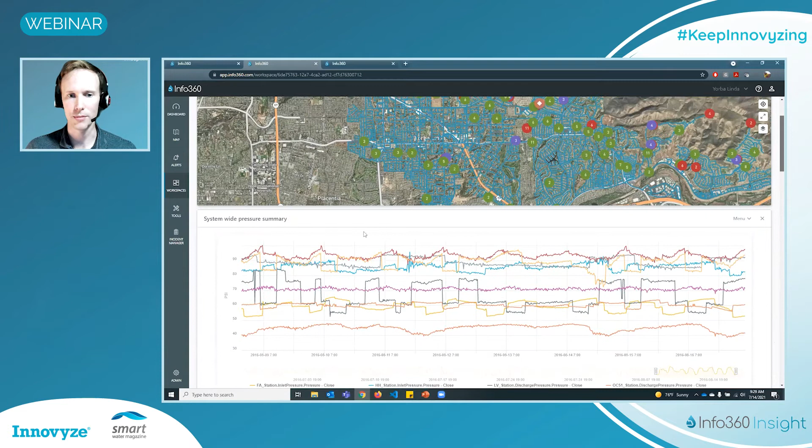So really, just like a typical web dashboard, we can set up web maps, graphics, displays. These are fully customizable, so you don't need programmers to program it and have it etched in stone where users can't customize it. Any user can take these, duplicate one that we've already created, and then zoom in on the data.

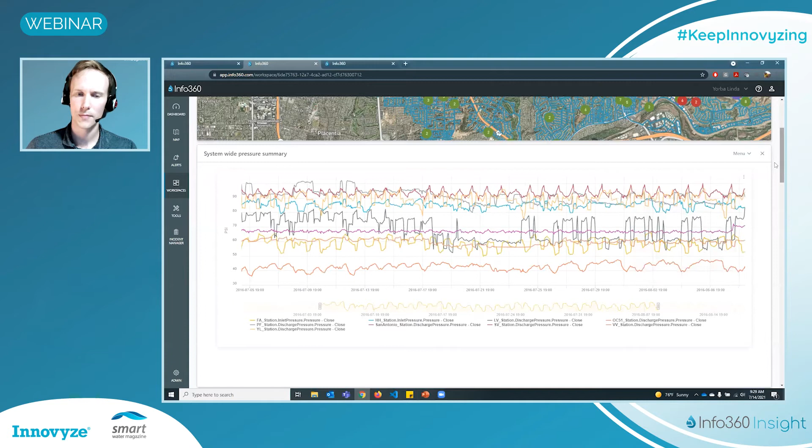Once this is up, sifting through the data is really fast. We can zoom at different time scales and load in quite a bit of data. These are different pressure sensors. I can highlight the different pressure sensors, and I can overlay different alert thresholds, moving averages, or other analytics. If I step down, we can also look at gauge charts.

In some cases, operators, rather than looking at a history, may want to just see at a glance the snapshot of how things are right now, one for each pressure zone, for example. So this shows the latest value and then a peek at the latest 24 hours.

We can also look at a long history. This is 3 years of pressure data overlaid with a moving average, so you can see the instantaneous results compared to that moving trend.

Here's another example where I think this is just a 15-minute pressure sensor. You can sift along, and as we get to a certain event, the pressure drops down to around 45 psi in this zone. One of the nice things about having all of the data accessible is that when that pressure drops, you can easily lay out these workspaces and have access to other sensors.

A pressure drop by itself, we're not really sure exactly what that means. But one of the things we are doing is calculating the water usage each hour of the day for each zone. So here is a look at that water usage for that same pressure zone where this pressure sensor came from. Corresponding to this, on March 23rd, where that pressure drops, we see a corresponding large jump in water usage.

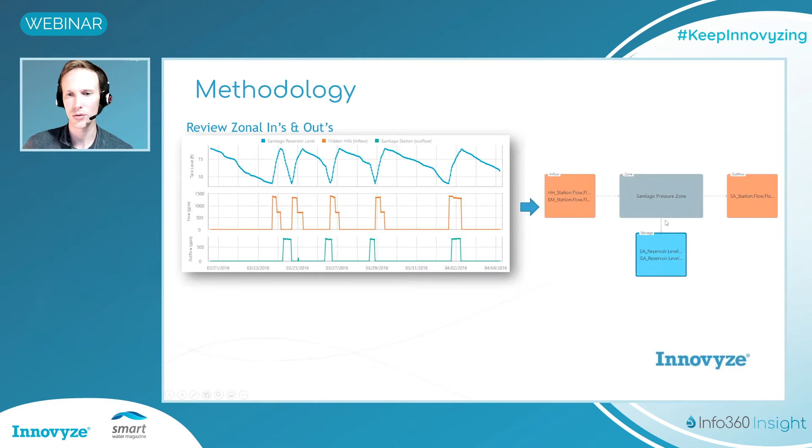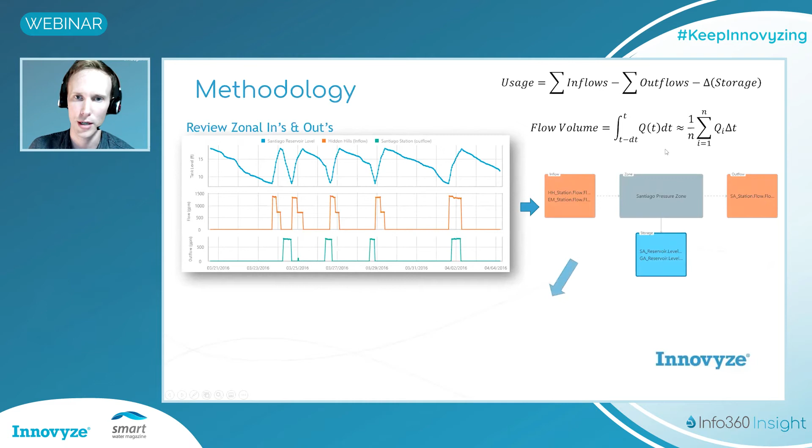The requirements are flow meters at all main boundaries between the zones, and tank levels with their storage parameters. Just a quick note on the methodology: if you have a zone where we have a tank level going up and down, and pump stations flowing in and out, from the UI we can just drag in those corresponding sensors into our mass balance network. We do simple mathematics, summing up the inflow volumes. For the flow, we integrate the volume over time based on the time steps you have for your actual flow data. The outcome is that diurnal time series.

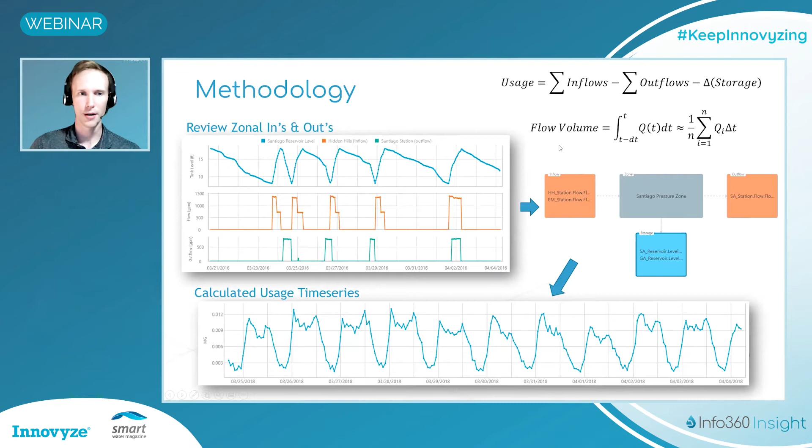This is kind of a pretty foundational thing that you may already have if your system has DMAs, but I know in North America, where Scottsdale is, not many have this, or not many have the paring down at this kind of scale. So where can we set this up?

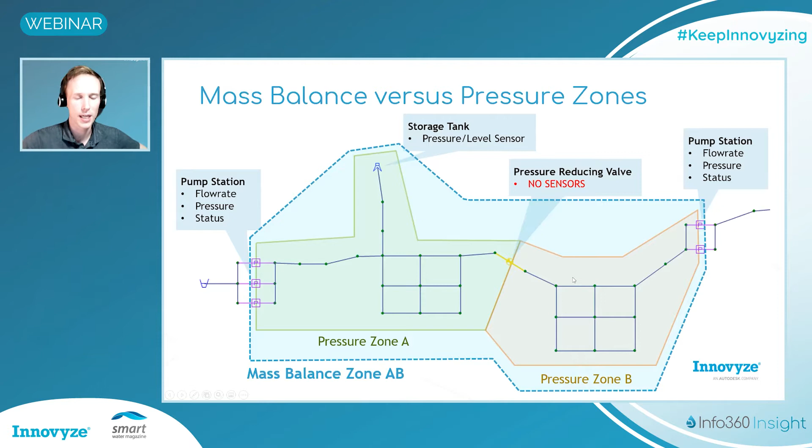That's one of the things we're going through with Scottsdale. They have 149 different pressure zones, but a lot of instances where there are PRVs where we can't isolate. So we are doing mass balance where we lump together zones. There are a lot of benefits where we can do leakage reporting and burst analysis on those lumped together zones, and then help them identify and prioritize locations where adding a flow sensor can divide up your analytics and get you a lot more value out of what you have.

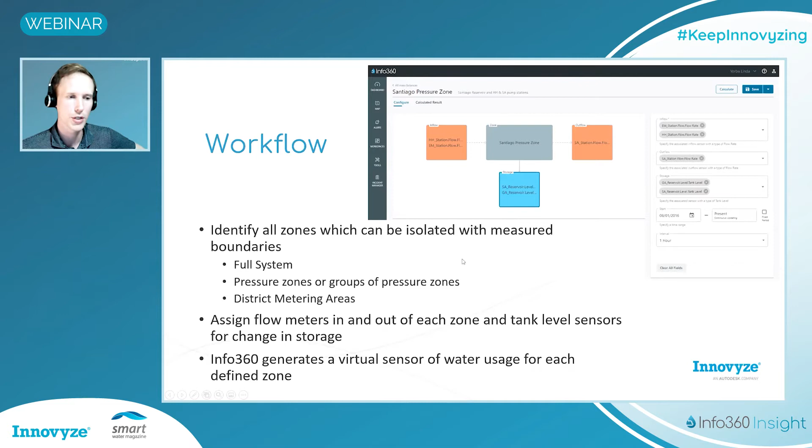So the workflow—this is the UI. We don't need to go into too many details because we can help set this up during implementation, but there's a UI where it's pretty seamless to just drag in the sensors for inflows, outflows, and storage and set that up. Then it generates that time series like a virtual sensor in real time.

There's a pretty simple UI, so we can set this up for your mass balance, but users can customize these different patterns pretty easily using the interface.

Another key value is looking at pump efficiency. What we can do is take the pump sensor data based on what's available, and display real-time points of where the pump is operating along its curve. The outcome is that the operations and maintenance team can then prioritize pumps with the highest deviation from the manufacturer's curve.

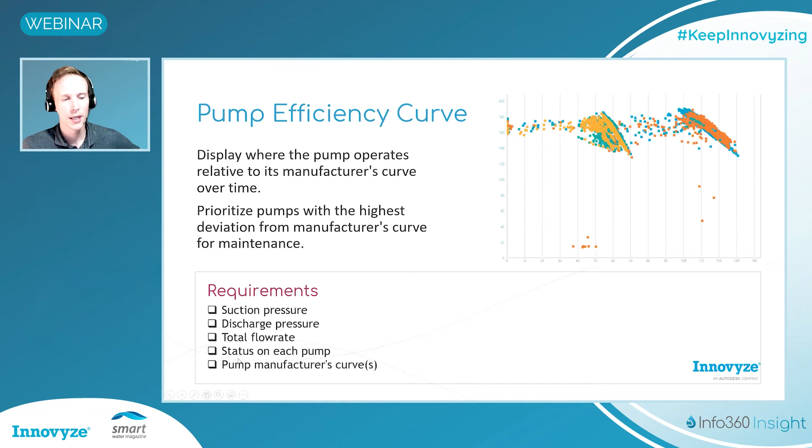And so you can see which pumps are performing the least efficiently, essentially. The requirements for us to do this on a given pump station are a suction pressure, discharge pressure, the total flow rate, a status sensor on each pump, and ideally the pump manufacturer's curve.

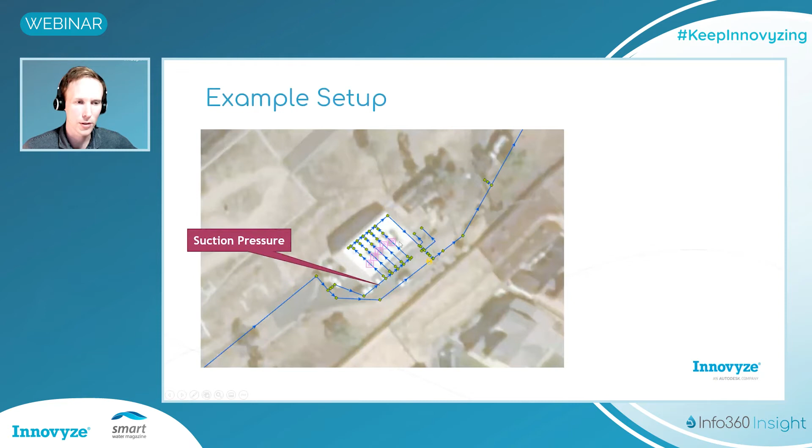So just a quick look at what that looks like. If this is a pump station with the flow directions, we usually have a suction pressure sensor around there, a discharge pressure sensor, and we need the total flow rate. Usually in SCADA, there might be graphs like this that we can generate.

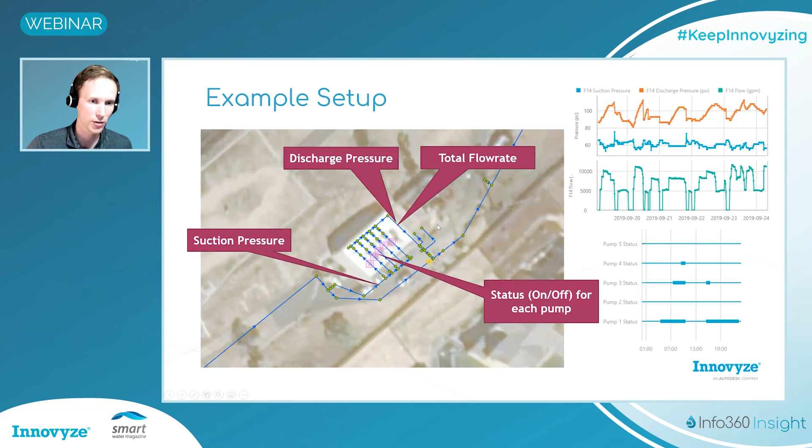And we also need, in this case, if there's 5 different pumps, the status sensor for each pump so that we can use these statuses to filter out the total head difference and flow rates, and then filter out the times when each individual pump is operating by itself so we can isolate individual pump performance. So we don't need pressure or flow on each individual pump, just for the full station, but we do need the status on each individual pump.

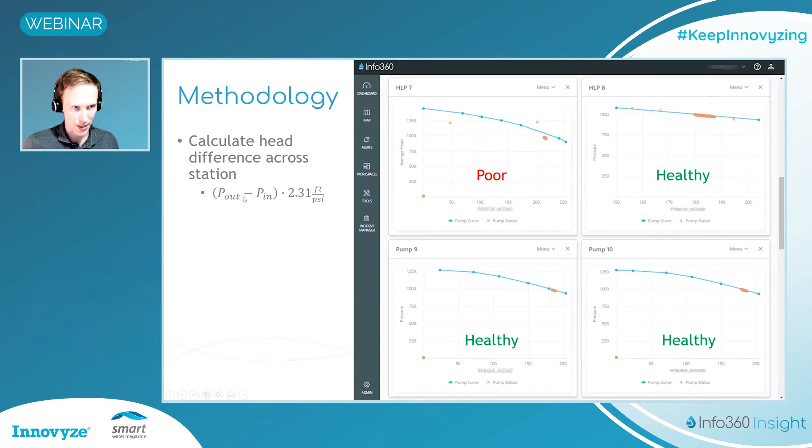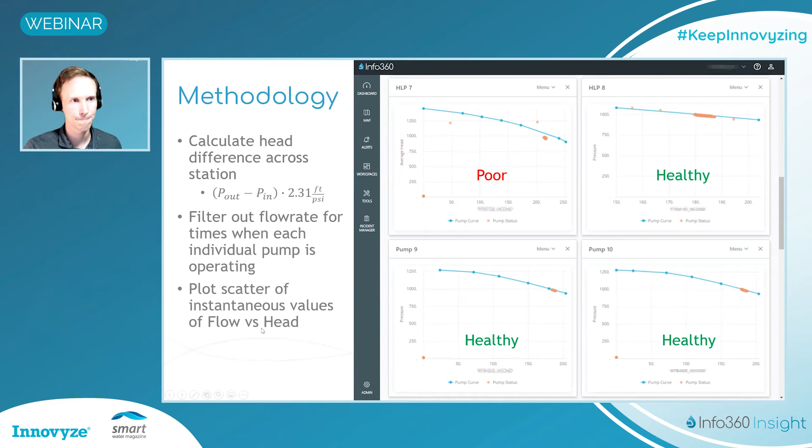But the methodology is we take those pressure sensors in and out, we take the pressure difference. For our US customers, they're usually in PSI, so we convert it to feet using a simple 2.31 factor. And then we filter out flow rate time series for each individual pump, and then we plot the scatter of those instantaneous values for flow versus head, and we can compare it with the manufacturer's curve.

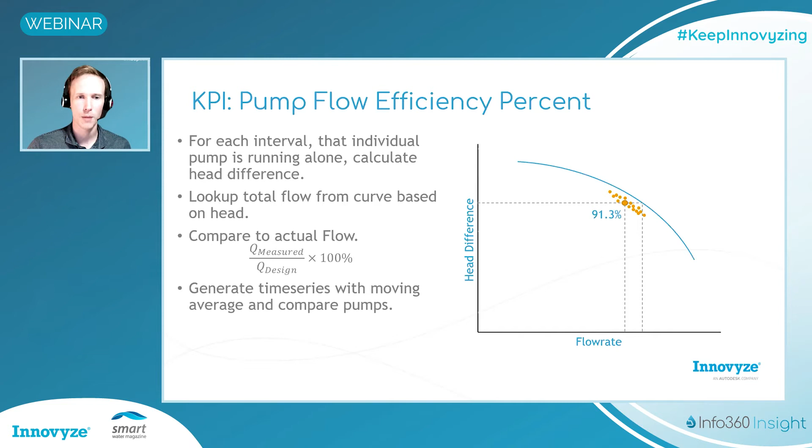We could really generate a time series of many different values as that pump is operating at different points in time, come up with a moving average time series, and then you can compare that across pumps, and you can see which pumps are the farthest off the curve versus others.

All right, and we can also do break impact assessment. I showed a little bit of this in the software, but ultimately, once we have your model connected to SCADA, we can set up those dashboards. The requirements for that is we really just need an up-to-date hydraulic model of the system, and having the SCADA integrated is a key step in getting the model up to date.

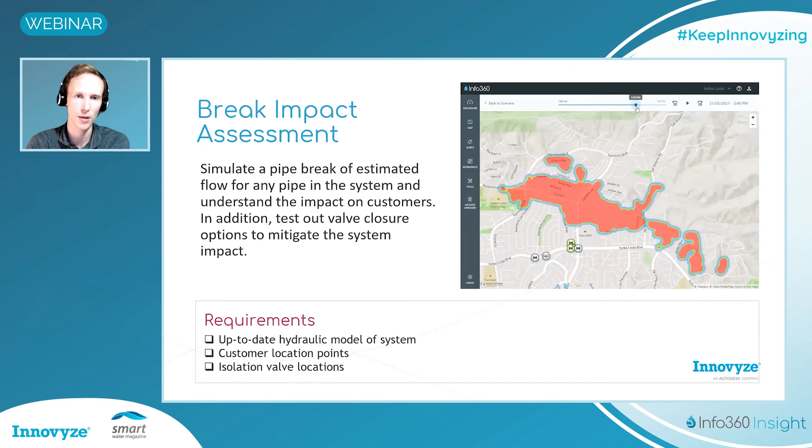And then we also need the customer location points, as well as the isolation valve locations. For InfoWater Pro users, we don't need those valves to be in the model - we can just use GIS points, and then we associate it with the nearest pipe, and then we close that corresponding pipe.

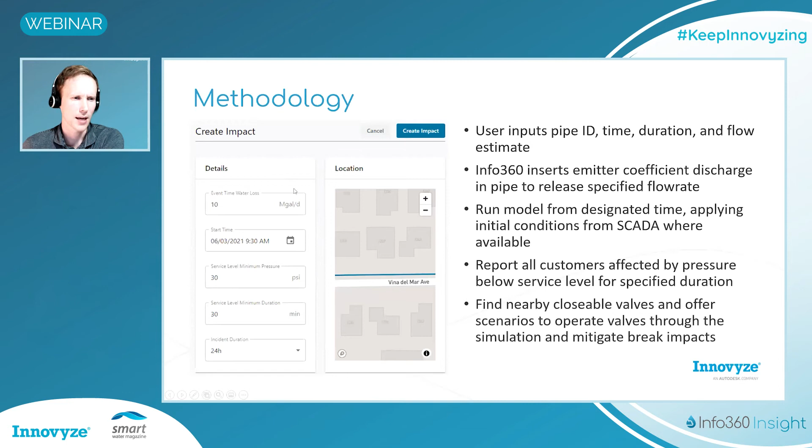And so this is a little look at that workflow for users. I kind of already showed that in the software, so I'm going to skip past that in the interest of time. I'm noticing that we have 12 minutes left.

So then the final piece is integrating the hydraulic model, which was kind of a key driver for this for Scottsdale. And so the flow of data goes both ways. We can take your InfoWater Pro model and publish it to Info360. We can use that to generate the web map of model objects. We can also incorporate the customer and valves. We can also use the model for your designated scenario to do easy simulation management, or incident management simulations.

We can also take that data from Info360, pulling real-time SCADA. We can pre-process that SCADA to clean it up, and then bring that back to the model for on-demand initial conditions. We can take that mass balance water usage profiles, create those patterns I showed earlier, and bring those directly into the model for the process demands.

There's also a gap analysis dashboard, so once you choose to run a SCADA run for any event, like let's say we wanted to run the model for yesterday, you just input that date, run the model, and then you'll get a dashboard for how your model compares against the SCADA data for that date and time, incorporating initial conditions, the demands, and in upcoming feature development we're looking to bring over all of the pump control time series and so on.

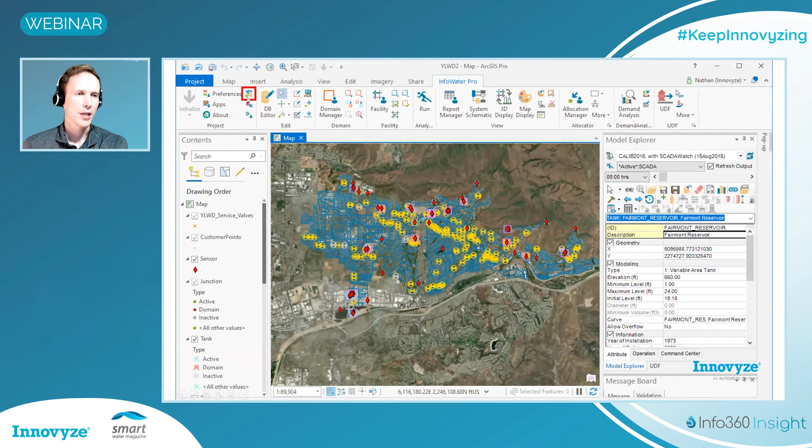Here is our live data adapter tool, where you can jump to a dashboard so a user can get a quick range of statistics for how well the model is comparing against SCADA. You can customize color categories for how the model is comparing. This example is not a well-calibrated model, but it's just an example.

This graph shows the difference between model and measurement in terms of flow, and you can also drill into individual graphs. It's all an interactive dashboard, so you can sift through and pick which ones you want to compare against. It's a floating window, so you can put this on a separate monitor while looking at your model.

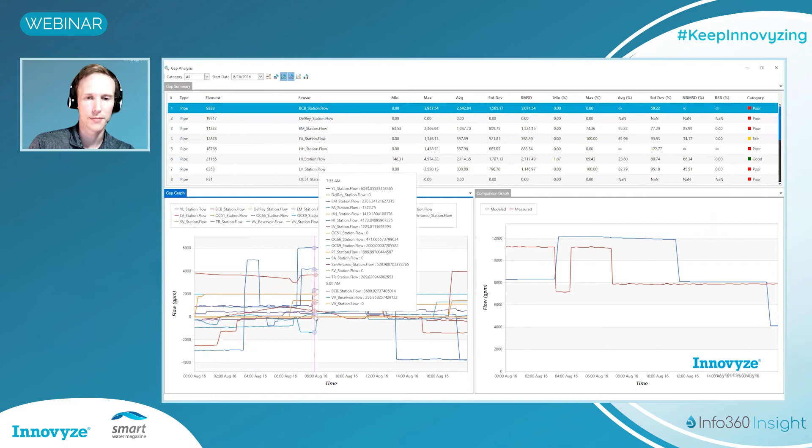So we're doing a lot of work right now in InfoWater to really streamline the calibration of models now that you have Info360 SCADA data, and that has been kind of a key workflow that our users get hung up on is ease of calibration, because it can be a challenging process.

So what are the benefits of improving that calibration process and actually keeping a water model current? We have one of our users we did a webinar on a year ago, where they're actually doing bi-weekly model validation against SCADA. They're keeping their model validated to SCADA on a regular basis, so anytime operations asks the model a certain question, they have confidence that their model is up to date. So how do we do that?

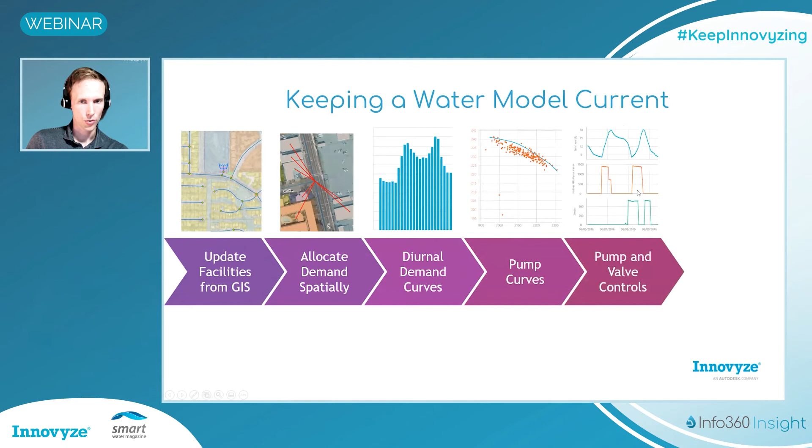You have to update the model facilities from GIS, allocate demand spatially, bring in those demand diurnal curves, update your pump curves, update the controls from SCADA, and then actually do the calibration and employ user modeling expertise to know what parameters need to be changed. This is what is needed to keep the model current.

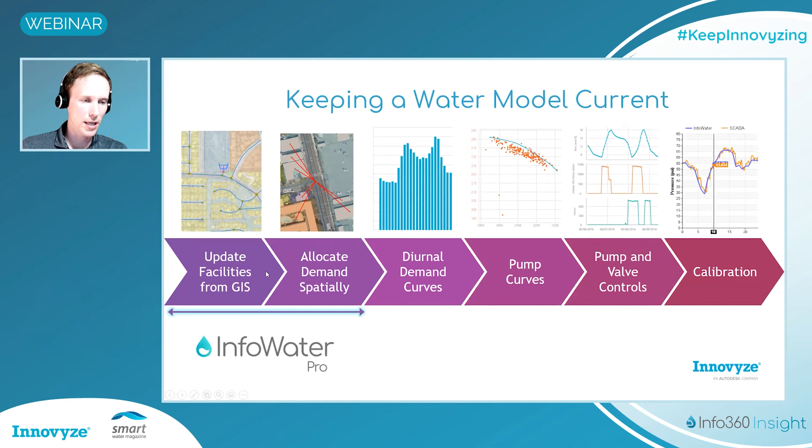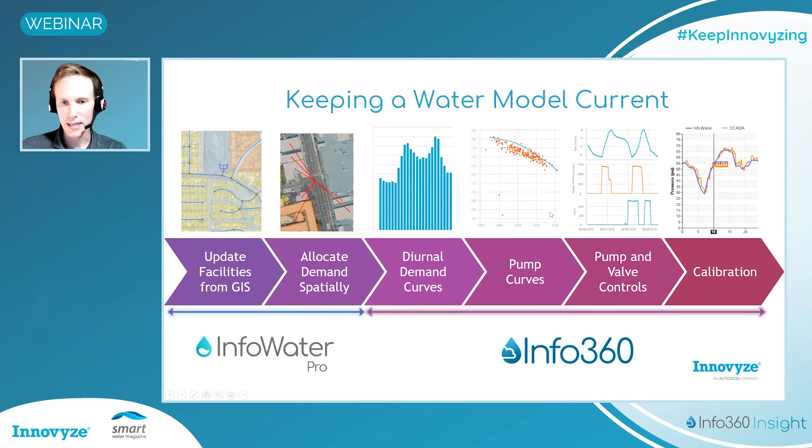These two functionalities are embedded into the InfoWater Pro workflows using GIS integration, but the rest of these are SCADA integration. Typically takes a while with conventional approaches, but with Info360 that's streamlined.

Some of the benefits of having that integration: with Info360 plus InfoWater, you can respond quickly and confidently to performance changes. You can provide insights to operational responses, supporting decisions with evidence rather than just anecdotal evidence. You can also do water quality assessments once your model is reliable.

You can understand system behavior between gaps in sensors. You can't deploy a sensor at every single location - that could be cost prohibitive - but once your model matches those sensors that you do have, you can then trust the model in between the sensors with more confidence, and keeping the model up to date on a regular basis can reduce the upfront costs on master plans.

This is money you often are needing to spend anyways in the long run. So keeping the model up to date in the current time and shaving off that time really helps you benefit with all these other things in between. And so that is just a high level benefit.

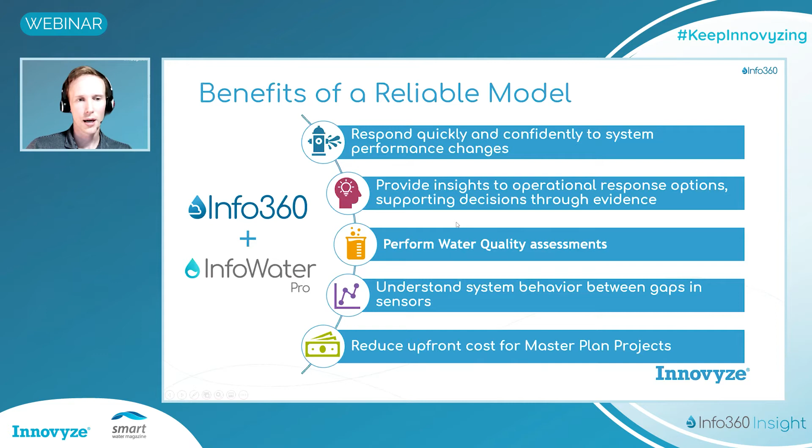Thank you very much for presenting to us what Info360 looks and feels like with the different examples of the workspaces. We have seen uses such as calculating mass balances for water usage, looking into pump efficiencies, pattern detection, assessing the impact of incidents, and hydraulic model integration.